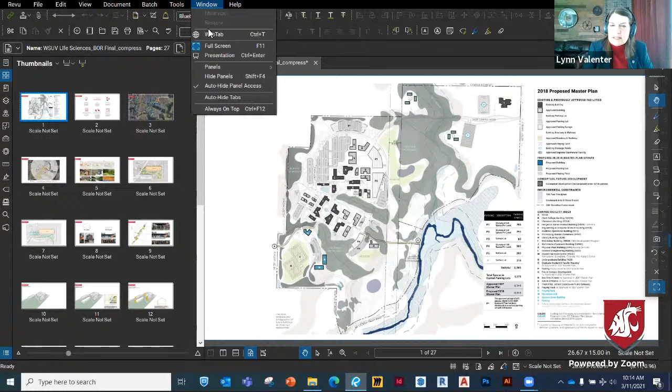Speaking to master plans, campus master plans are resource intensive, visionary, and they're intended to provide a holistic assessment and framework for campus development that guides growth for the entire entity, ensuring that each project contributes to optimization of character of space. WSU Vancouver adopted its first master plan in 1993.

It formally approved updates in 2007 and most recently in 2018. Each plan has been an update to the original, further emphasizing character and growth while staying true to the original campus orientation and plans. Each has been formally approved by the Board of Regents and the regulatory authority for campus land use, which is Clark County.

The original 1993 plan emphasized the permanent protection of the Mount St. Helens and Mount Hood View corridors, with the original quad centered at the intersection of the two corridors, surrounded by meadows. The 2006-07 update added 5 additional buildings, contemplated graduate student housing, and further examined and emphasized the development of a series of spaces along the corridors, with clusters of buildings creating a centering space.

It also introduced parking garages in addition to existing surface parking.

In 2018, the update original elements were examined and refined, and undergraduate housing, student life, and 3 other buildings were added. The adopted plan specifically noted the materials used throughout campus that were reflective of the character, while noting the need for design diversity and spaces welcoming to all. The materials included the green metal ridged roofs, the masonry brick, and Camas basalt.

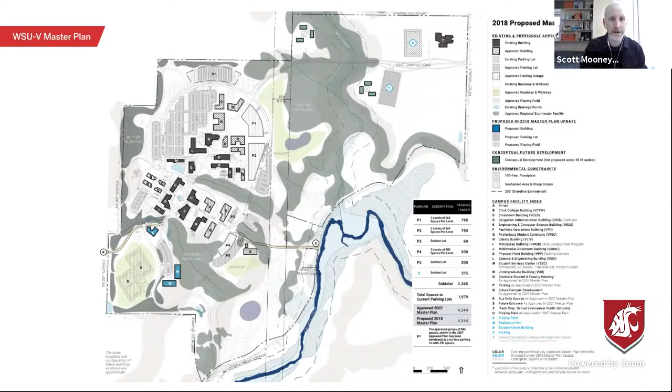Scott? Thanks so much, and thank you everyone for joining us today. We're really excited to share the work that we've been doing with everyone at WSU on this project. We're very excited about it for a variety of reasons, so we're excited to share.

For this project, one of the things we'd like to talk about before we get into the actual building design is really about the values around which we're trying to make decisions for the project. These are what we like to call our guiding principles, developed through a robust remote survey process, and through a lot of conversations with all the different stakeholders on the owner side with the university, but also on the student body side.

We came up with 6 values that we keep referring back to when we make those critical decisions: connecting and learning, making sure the building is adaptable and changeable over time, fostering connections both within the campus community and to the community within Vancouver itself, understanding and prioritizing those unique view corridors, reinforcing WSU Vancouver as an engine of opportunity and equity, and finally trying to find design solutions that really work for everyone.

So this is the location of the building relative to campus as it exists today. As you saw in the master plan we shared earlier, there are a lot of ideas around how it expands to the north over time. We're trying to be a stepping stone to that future growth as it grows to the northeast along the Mount St. Helens corridor.

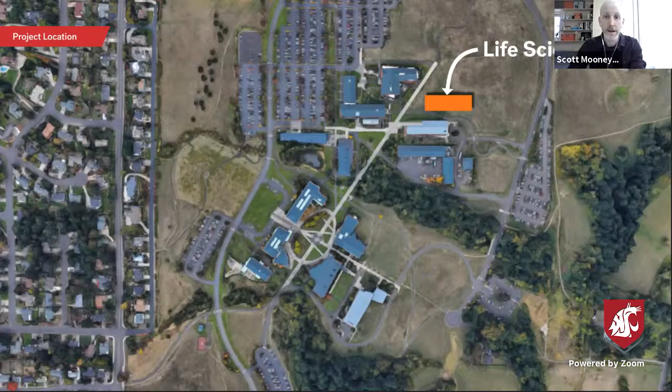This next image is a diagram that's abstracting some of the buildings, but also talking about some of the master planning concepts that we're trying to carry forward. One of the biggest being the square that was part of the master plan, envisioned to be occurring on the northeast end of the Mount St. Helens corridor, and really would be an outdoor room defined by the edges of these existing science buildings along that edge.

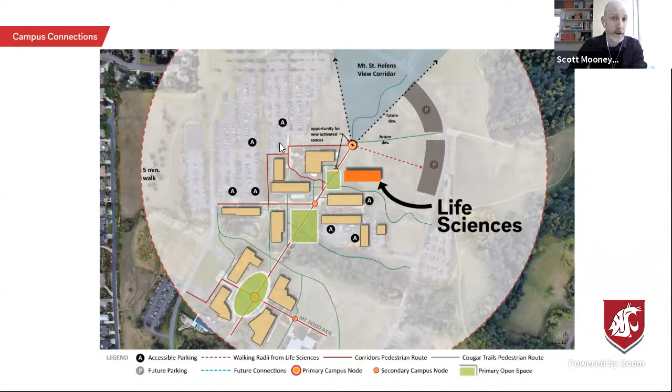But we're also thinking about views beyond to Mount St. Helens and how we connect down to future parking and future development. Another item to notice here is the route of accessible connections and pathways, and where we are locating ADA parking, or where ADA parking is located now, and how we're responding to that.

In terms of the spaces around the building, the site response, these are the big three concepts that we're using to drive the building location and how we develop the spaces in between, which really is the campus portion of it.

As you can see, the square is a big concept that we're trying to reinforce, that was part of the master plan, but we're also looking at a secondary plaza on the lower level that makes the entry off of the ADA parking, shared with the ECS building, feel equitable and feel like it has some parity with the square, which is the entry off of Mount St. Helens.

We're also looking at outdoor education opportunities. Is there a way to create some spaces in between the buildings that start to reinforce some of the curriculum around pollination and salmon-safe ideas that are being carried within the building itself?

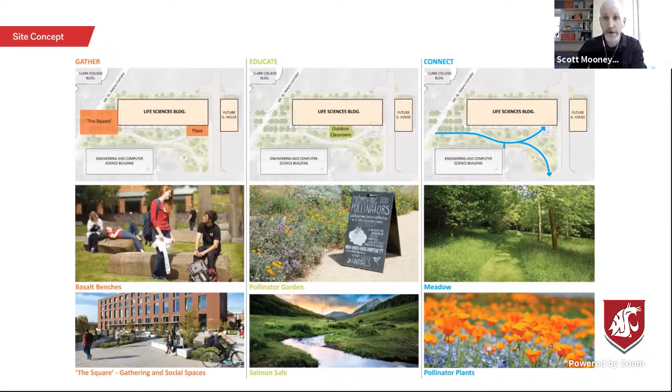And then finally, looking at the connections down the hillside, how can we really lean into the bucolic nature of campus and these rolling hills that really help enhance the beauty of place there?

This is a more detailed version of some of the ideas we're exploring. Something to note is the images you're seeing here are a snapshot in the design evolution. They're the big ideas, the general direction we're trying to go. These will change over time as we develop the schemes, but this is the general direction we're hoping to have your approval for today.

So as you can see here, this is a more defined version of the square, where we're really thinking of it as a gathering space that is contiguous with a generous lobby space, providing an indoor-outdoor fluid connection between this node on campus and what's happening interior to the space.

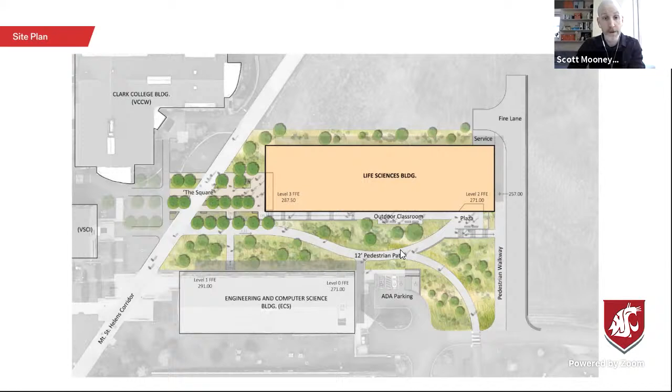We also have this plaza down here for the access off of the ADA parking, and then potentially some outdoor classroom. And this is how some of the moves we're making in terms of the landscape design are being rooted and anchored to some existing paths of travel.

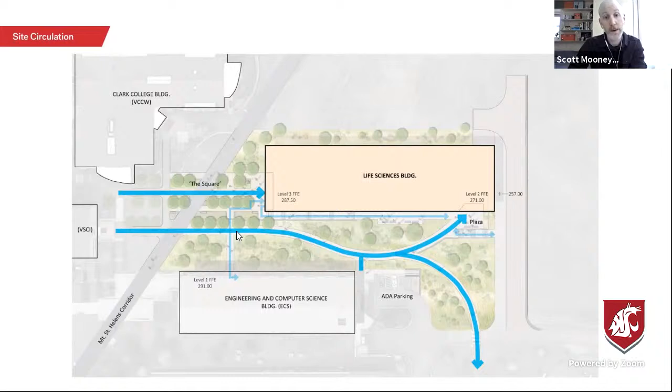From the VSCI building and between the Clark College building, we're really looking at existing arterials and ways that we can connect and reinforce some of those different pathways that already exist. In terms of the architectural language, there's a really clear campus character around a few different typologies of buildings, the gable being the most prominent.

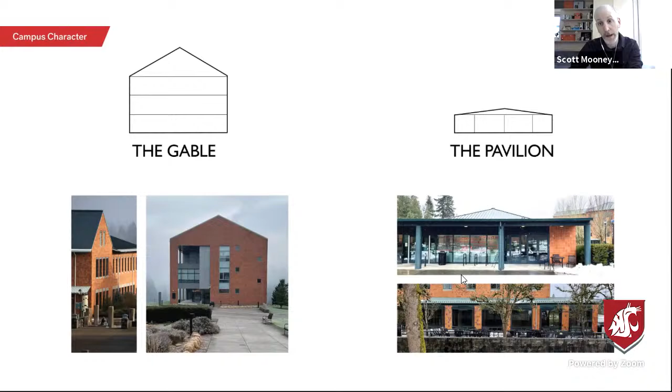And that's where you see these larger scale forms that have that gabled roof. But there's also this interesting language around smaller scale spaces, and we're calling that the pavilion.

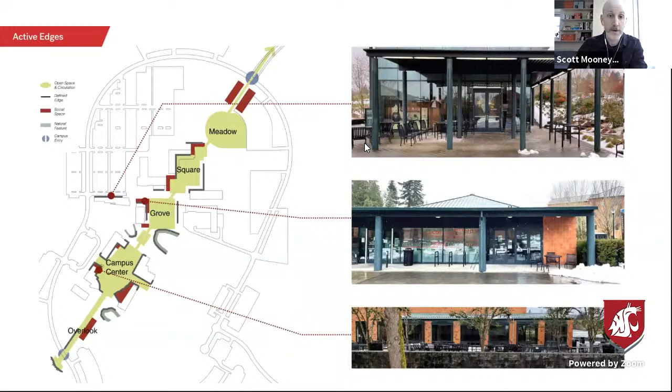And something we've observed, going back to some of the diagramming from the master plan, is that a lot of the most successful active edges along campus, those places that really are the heart of a lot of the student activity, tend to be off of the pavilion-type structures. So we were using that as a way to help with some of our design decision making.

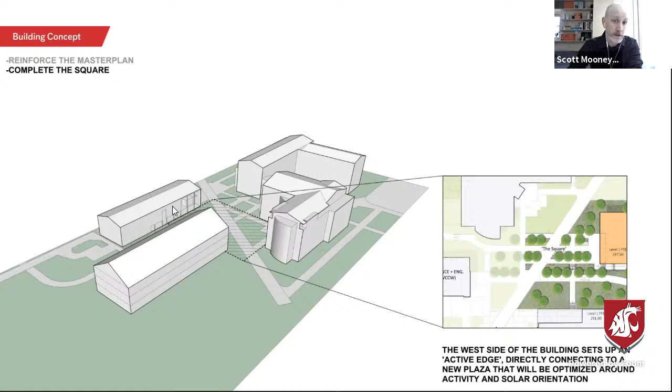First, we wanted to reinforce the master plan by completing the square. And that really led us to position the building in a way that created a well-scaled outdoor room between those existing structures.

We also looked at the form of the building and how it could be part of that family of gabled structures that you have on that end of campus, so that when you view it from the west and look uphill, you really see it as a collection of these similar forms.

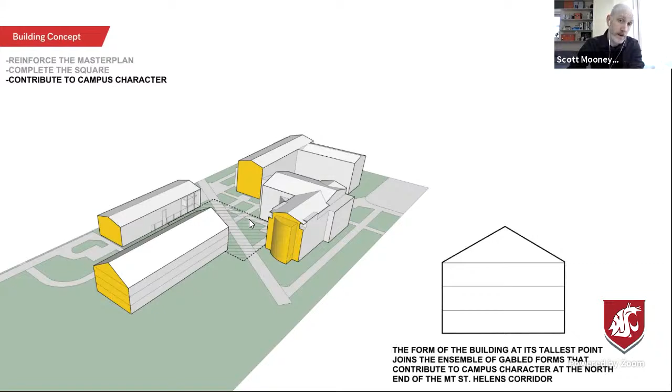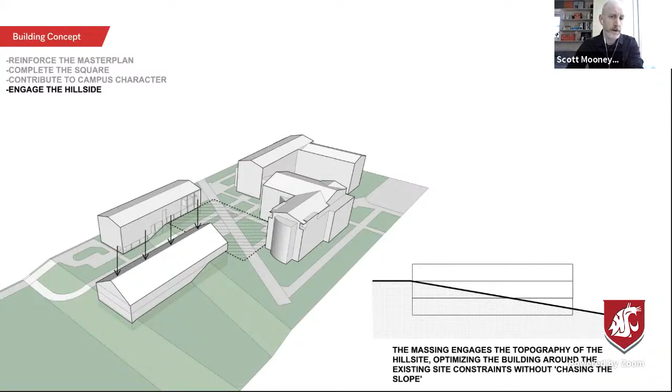But we then also wanted to make sure we were understanding and responding in a meaningful way to the topography. And as the hillside drops down, we really wanted to nest the building into that landscape in a way that made it feel like part of the place in terms of the topography.

But then shape that landscape so that we could carve out areas for daylight and views for some of those program areas that were starting to get nested into the ground.

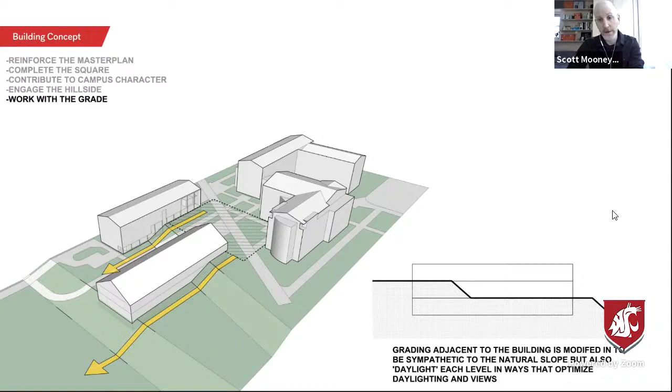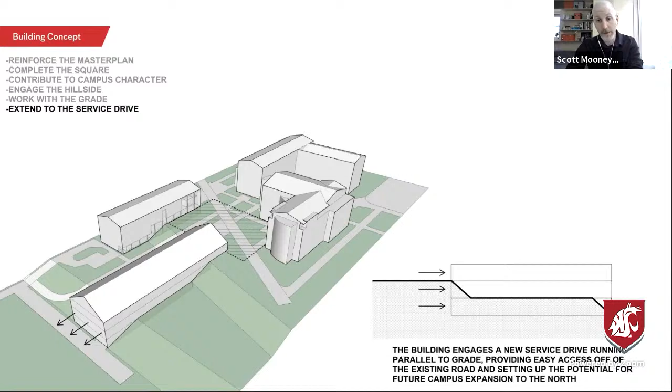And we then wanted to push the form out a bit so that we could help reinforce and create a new service road that would connect to the north in a way that allows us to set up a sort of public versus service accessible routes to the future campus growth that would happen to the north. As you can see, there's a portion of the building that's sort of underground, and that's by design.

From there, we redistributed the program in a way so that the underground spaces really were those more private and secure spaces, that being the vivarium and the mechanical rooms, but then took a lot of the more active public uses and pushed them back up to the top of the building.

And so you end up with this cascading footprint that allows us to find value in terms of minimizing the amount of overall enclosure, but really putting those more active uses off of that most prominent entry that is on the Mount St. Helens corridor. And then it brings the research down a level so that it's adjacent to the vivarium and those support spaces that are nested into the hillside.

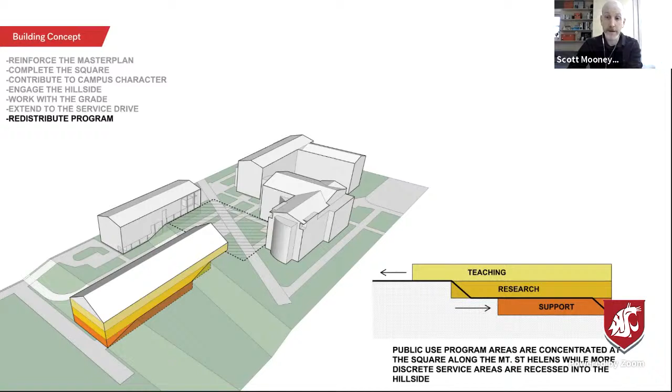It then allows us to create connections to those different levels and sets up different public entries on the top floor, on that middle floor with the research level, and then a more secure entry that's off of this more discrete connection from the service road.

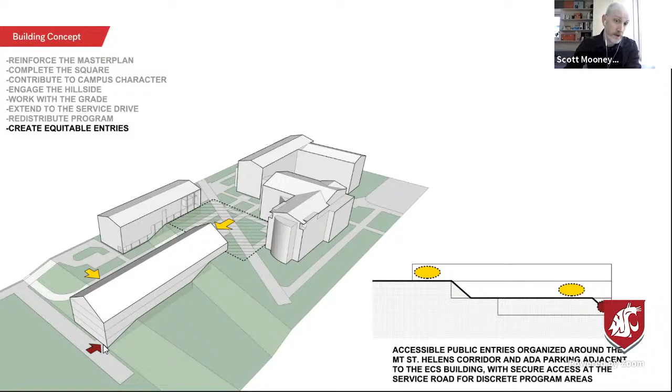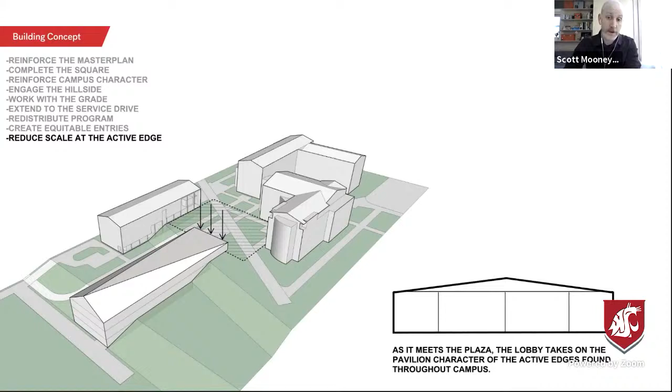From there, we looked at ways we might influence the form to do a couple of things. First, reduce scale at the active edge, reinforcing that kind of smaller scale expression that we know is so successful for the other social spaces on campus.

But another critical value that this brought to the project is it allowed us to step the form to reinforce the view to Mount St. Helens, particularly from this really prominent conference room in the ECS building that we know is frequently used. One of the major qualities of that space is that view out to Mount St. Helens.

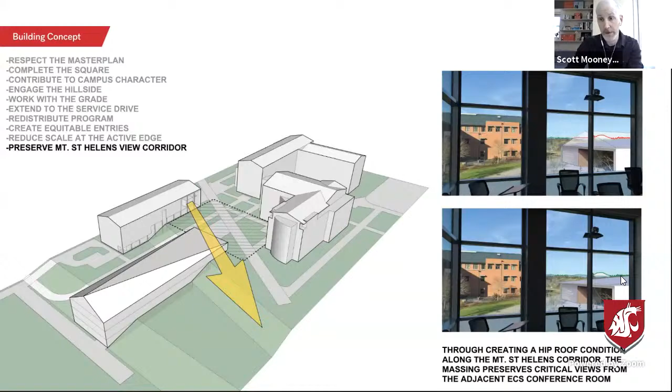And so you can see in this study we did on the right, if we were to actually maintain the gable form, it would block that view of Mount St. Helens. But by making it more of a hip roof and a pavilion form, and merging those two different types of roof structures, we're able to maintain that view out to Mount St. Helens.

In terms of the materiality, we are doing everything we can to respect the existing campus vernacular. The masonry you see on the left is what's used on the ECS building, and before that, the same mix and form that was used on the undergraduate building.

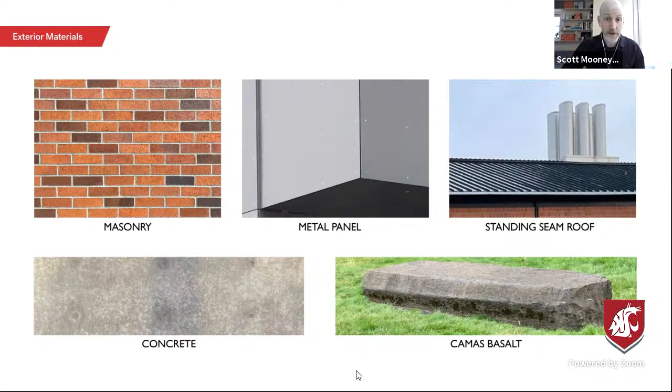This is the metal panel from the ECS building that we're taking cues on, and then also maintaining that consistent language of the standing seam roof, the Camas basalt for site moves, and some mix of site-formed concrete as well.

And so this is just kind of glimpses of a moment in time in terms of our design. Again, like we said, it's evolving, but we really are trying to reinforce the materiality, the gable form, the proportion that you see elsewhere on campus.

So this is the view from the east. This is a service road running along that east side. And then this would be those lower entries into those more secure spaces.

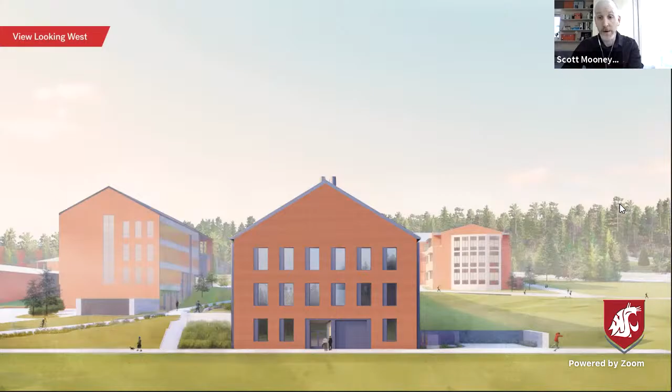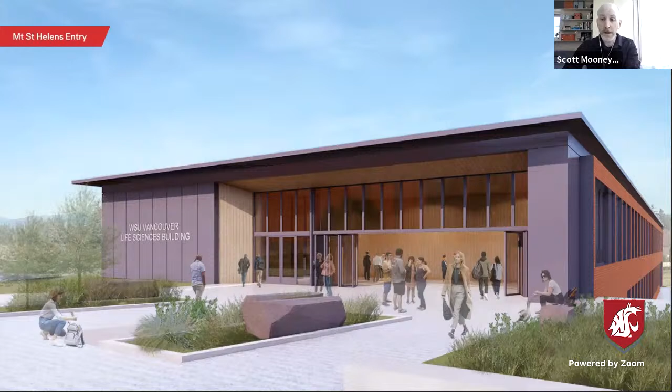And then on the west side, you can see how the form steps down to create that smaller scale space and maintain those views. This is looking into that west entry where we would have a sort of primary building entry, but then we would have what we would hope to be a more open and porous connection into this lobby area that would be smaller scale study spaces, or it could be used for open events.

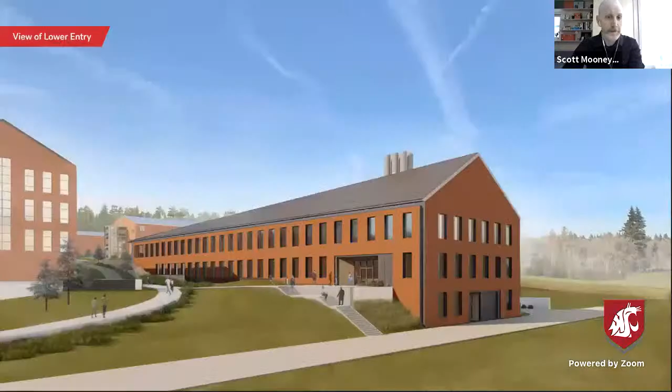But the hope would be that it would really feel like a natural extension of the plaza, and you'd really have that strong indoor-outdoor connection between those spaces. And then finally, this is looking back at it from the southeast, and this would be that lower entry off of the ADA parking.

You can get a sense of how the pathway continues to roll down the hillside in a very organic way. In terms of the internal organization, this is that upper level off of the Mount St. Helens corridor. These would be the teaching labs.

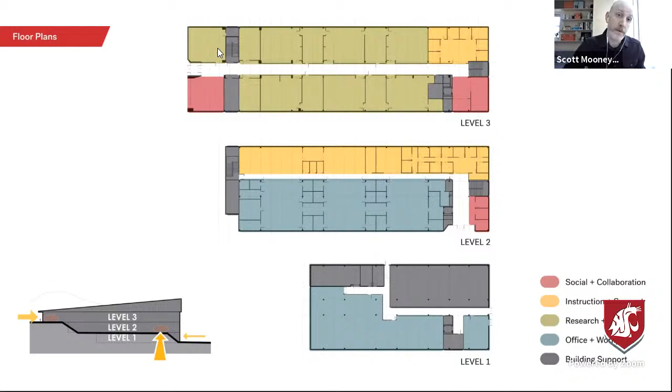Our nursing program would be consolidated along the northeast corner with the classroom and seminar spaces adjacent to the main lobby. As you can see, the lobby is off to the side of the primary circulation, which would then get you to a major feature stair that would bring you down to that lower level lobby that also has more public spaces, these being collaboration spaces off of that lower lobby.

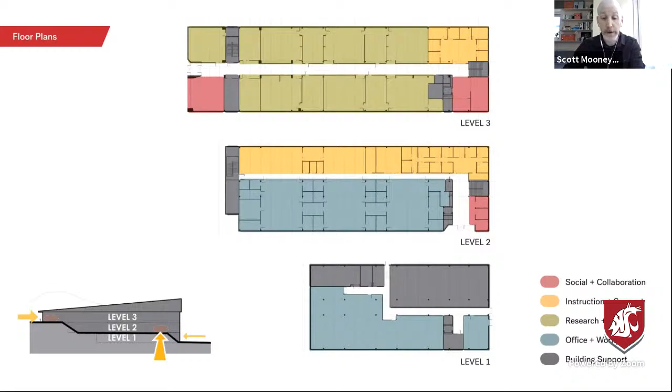Here would be the research labs, and then the offices, research offices supporting those labs. And then finally, when you get down to the lowest level, you would have the vivarium and the mechanical essentially buried into the hill. And that is where we stand with the current design direction. Thank you so much for letting us share it with you, and I'm excited to hear everyone's feedback.

Great, looks like John has been able to join us by phone. So sorry that he's not able to see all the great graphics here, but I know he will catch up on this stuff and probably have some input offline. Sounds great. And Heather, the photos are in the slide presentation in the packet as well. Right. Hopefully he can actually get on there. I know how it is when you lose internet and power and who knows what else.

So I had an observation and then a question. On the question, I know that we are very concerned about sustainability as a university and are driving toward that in a lot of our operations, and will be increasingly driving toward that. What does this building do in terms of advancing the cause on energy efficiency and sustainability?

Yeah, that's a great question. So we are being very cognizant on the architectural side to really make sure we're hitting the sweet spot between the amount of glazing we have relative to orientation and views, but not to overglaze it in a way that makes it an energy inefficient envelope. So what you're seeing here, each one of these openings is about 4'8" by about 10, 11 feet tall. So these are actually quite large openings, but relative to the overall building area, it's about 30% glazing, which is a sweet spot.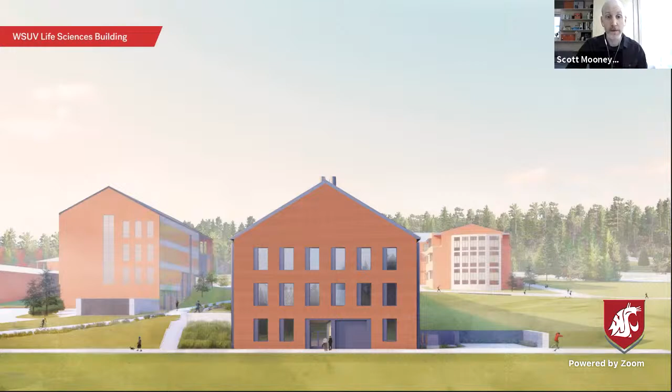And so there's some site moves around water efficiency as well. We're taking the holistic approach where we're exploring all the options we've got and finding cost-efficient ways to potentially get those points. But we're looking comfortably gold for this project based on the kind of early studies that we've done.

Okay, and I guess it would be nice, maybe this is something for Stacy and Kirk to think about, is do we want to set a certain bar for every new building that we do or retrofit that we do and have that sort of be system-wide? Just a question that maybe we should take up at a future meeting.

And then my observation is, I think this is really important, particularly post-COVID. One of the things I've been spending a lot of time on lately is economic development analysis for the state. And what's becoming increasingly clear is that knowledge workers who are place bound because they do actual physical things in the lab are going to be extremely valuable post-COVID. Knowledge workers who, like me and a lot of us on this call, who work with words and our voices and are able to manipulate databases from afar, are going to be increasingly mobile.

And so from a state's economic development perspective, really doubling down on these lab-based STEM careers and growing new companies out of the research that we do and our great faculty and students has always been vitally important, but post-COVID, it's like 10 times more important than it was pre-COVID. So I hope that as we're talking to the legislature about proceeding with this project, we really emphasize the fact that these are the jobs that will sustain Washington State, and putting an emphasis on this kind of facility is pretty much the highest priority I can imagine for us and for the legislature.